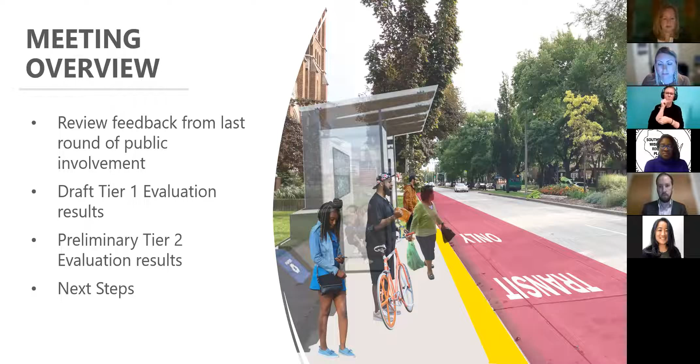So we wanted to talk a little bit about why we're doing this project. We're trying to provide some enhanced transit along this 27th Street corridor, so it's important to look at the area around the corridor.

The demographics around the corridor: 73% of the people living in the corridor are people of color, we've got nearly 1 in 5 households without a car living within a half mile of the route options, and 26% of the families who live in poverty in Milwaukee County live within a half mile of the corridor as well.

So providing enhanced transit service to these underserved populations is a priority for Milwaukee County, and we wanted to talk about some of the benefits. First, faster, more reliable access to jobs, education, healthcare, and other destinations by transit. We want a better experience for transit riders with improved stations and better, more frequent service, plus traffic calming and pedestrian safety enhancements near the stations - we'll talk more about the dedicated lane information later.

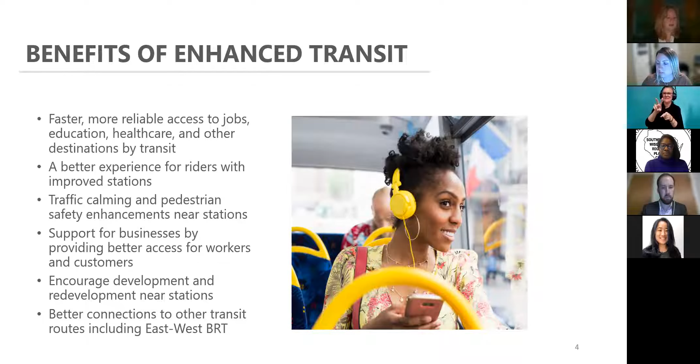So the range of alternatives we talked about after our last public meetings includes the transit technologies: bus rapid transit, rapid streetcar, and light rail transit. The route alternative options go from Brown Deer over to Bay Shore - we have two options getting to Bay Shore, one on Silver Spring, one on Hampton. Then the options run on 27th Street from Lisbon down to Drexel, which includes the Northwestern Mutual campus, over to Drexel Town Square in Oak Creek, and down to Ascension Hospital in Franklin.

So that's the basic range of alternatives that we are looking at for the study, for the Tier 1 study. All right, next slide, we want to talk a little bit about public involvement, and Nikki Payne is going to present these slides.

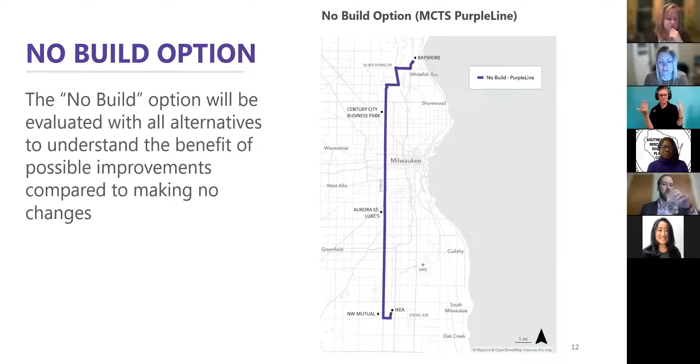Next slide. So for the three transit types—bus rapid transit, rapid streetcar, and light rail—they all have similarities in that they would all have enhanced stops, or stations, with off-board ticketing and level boarding, so that strollers, wheelchairs, and carts can be rolled right onto the bus from the station, no stairs. There would also be notification in the station for when the next transit vehicle is arriving, so it's a little more user-friendly when you're waiting.

For bus rapid transit, the bus would run in the roadway and would have at least 50% dedicated lane just for the BRT service. Its stations would be spaced about a half mile apart.

For rapid streetcar, that would run on the street as well, but on tracks installed in the roadway, with the route at least 50% in dedicated lanes. Station spacing would be about a quarter mile to a half mile apart. So it's a little bit different than the Milwaukee Hop, but the tracks and vehicle are similar.

For light rail, it would again be on the roadway, with tracks installed there. You can see there's a bit of separation between the transit vehicle and the regular traffic lanes. For light rail, the route is usually entirely or nearly entirely in dedicated lanes, with station spacing a half mile or more apart.

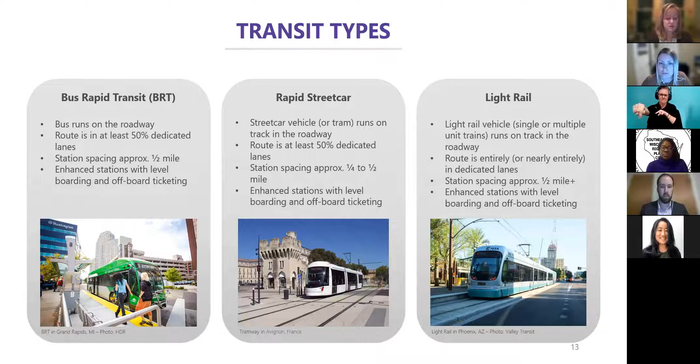So those are the transit vehicle options.

So then we looked at some factors to evaluate those transit technology types. We looked at typical capacity, so a right-sized mode for this corridor—how many riders we expect, and which service would handle those riders best. Typical service characteristics, like scheduling, frequencies, time of day, environmental characteristics, potential to bring in or catalyze development, and consistency with corridor character—what's there now and what would fit in best with the neighborhood.

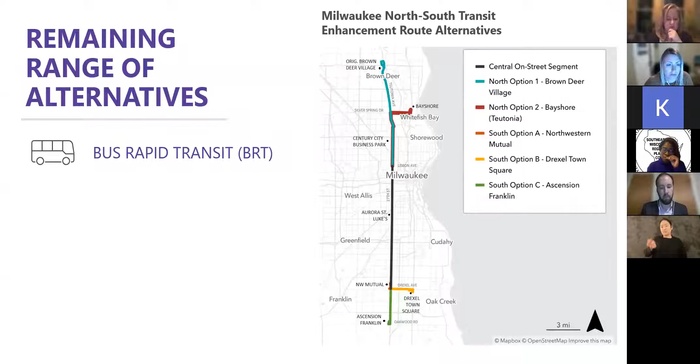After that evaluation, we have the remaining range of alternatives: bus rapid transit as the transit technology, with routes from Brown Deer over to Bay Shore along Teutonia, connecting to 27th Street, all the way down to Drexel, to the Northwestern Mutual Campus, over to Drexel Town Square, and down to Ascension Hospital in Franklin. That is what we've carried through to Tier 2.

Any questions regarding the Tier 1 evaluation that we've gone through so far? Anything? We do have some chats here.

Go ahead, Kevin. Yeah, we've got some interesting questions in the chat here. I was writing a long answer to Michael, but it's probably quicker to answer it verbally since it's a good time to pause.

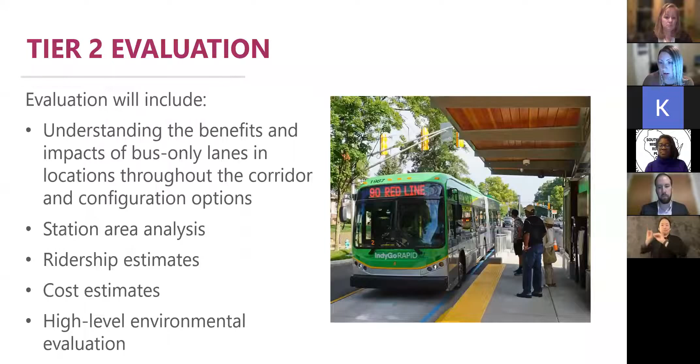So what are the benefits of bus only lanes? As Carrie mentioned in the last Q&A portion of the meeting, this is going to be one of the biggest things that impacts and improves the reliability of the service, and also improves travel times, allowing the bus to avoid traffic and other impediments in the roadway. It can also provide traffic calming depending on how it's implemented, which can improve safety. We've continued to hear a lot of feedback about reckless driving and traffic and pedestrian safety in the corridor, so we're looking closely at how we can best recommend these lanes so they do have that effect.

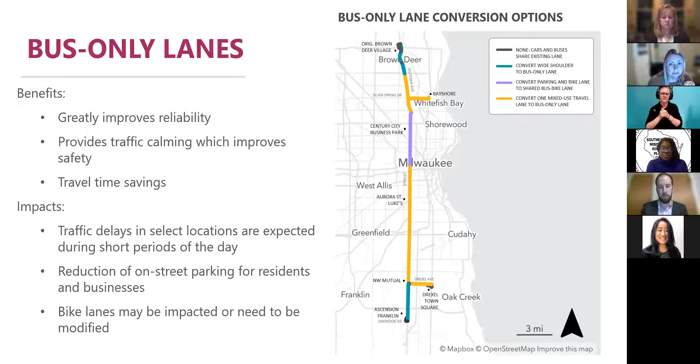But what does that really mean? What does significant traffic delay on a surface street mean? It can mean different things depending on how severe we're talking about, but really we're talking most likely about waiting for more than one traffic signal cycle at an intersection, during pretty specific times of day. In some cases, it also means slower driving speeds as a result of having more cars in fewer lanes at one time.

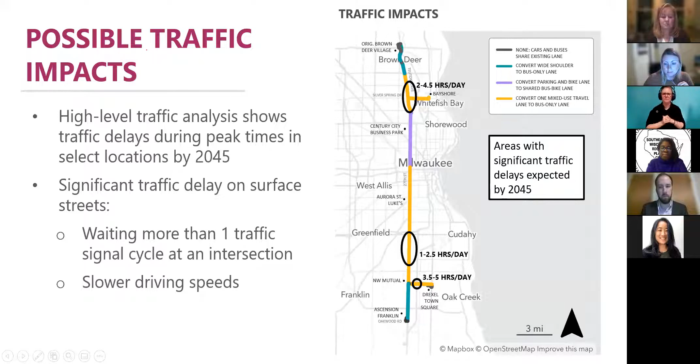Some of the configuration options we're looking at, as far as where in the roadway the bus only lane would be located and how that roadway would be configured, are going to be shown in the next 5 or 6 slides. These are examples throughout the corridor. As we move forward with the study, we'll provide some of these cross sections and what options are available throughout the length of the corridor. But this is just a sampling of that.

Starting on the far north end in the Brown Deer area, on Teutonia between Bradley and Calumet, the existing cross section is 2 travel lanes in each direction, a relatively wide median, and a paved shoulder on each side. So we've got a couple different options here. In this case, the paved shoulder could be converted to a transit only lane, either on the outside or the inside. A center running option could also be looked at in this area, where you would utilize the median for those stations.

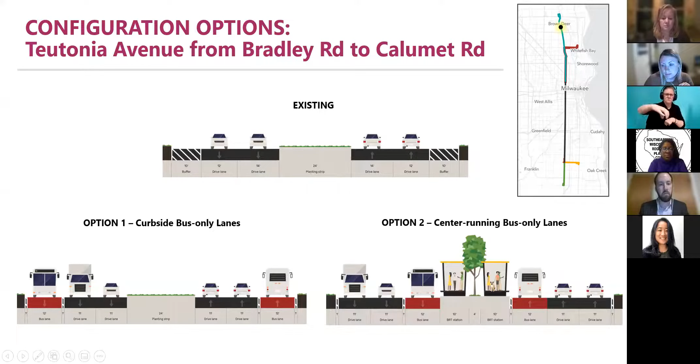Continuing down the corridor on 27th Street from Cornell to Atkinson, this segment has one drive lane in each direction, although it's relatively wide, about 16 feet in each direction, and then an 8-foot parking lane. So essentially what could be done in this segment would be making those drive lanes a little bit narrower, which is still well within the recommended width of a drive lane, 11 feet, and then have a shared bus bike lane.

In this cross section, we are showing these curbs here. I'm going to talk a little bit more about different options to actually physically separate a transit lane from a drive lane, understanding there are some pretty significant reckless driving concerns in this corridor. We don't want to recommend an option where a bus lane becomes a right-hand passing lane, making it even easier to speed or do things that reduce safety. So these are things we're going to look at, and I have some actual images to show in some of the cross sections.

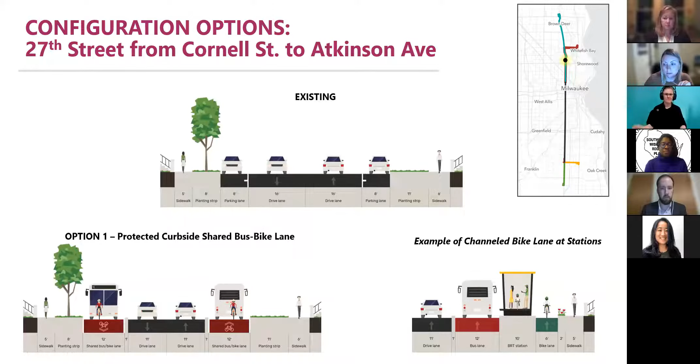Continuing south on 27th Street from North Ave to Lisbon Ave, this is somewhat of a similar existing roadway, although this is one of those segments that does have a dedicated bike lane in place. So we would be looking at having a shared bus bike lane along the outside, keeping those two travel lanes in the middle, with basically some kind of separated barrier possibly in this location.

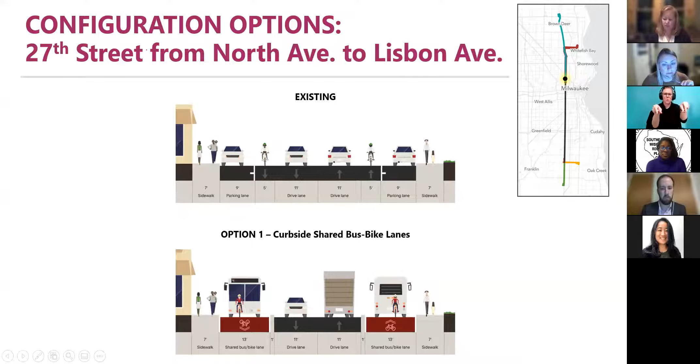On the 27th Street Viaduct, the long bridge that goes over the Menominee Valley, there are two lanes in each direction, a bike lane, and a painted buffer. An option on the viaduct would be to convert one of these travel lanes to a bus-only lane, retaining the bike lanes in each direction, retaining the sidewalk, and basically eliminating the painted buffer in the middle in order to have enough room for those bus lanes. One thing I'll talk about as we move to stations is whether we should recommend a station on the viaduct itself. That's a configuration that would have to be looked at, how the bus lanes would work with a station on the viaduct, and detailed questions that might alter how exactly this is laid out. That's just one example.

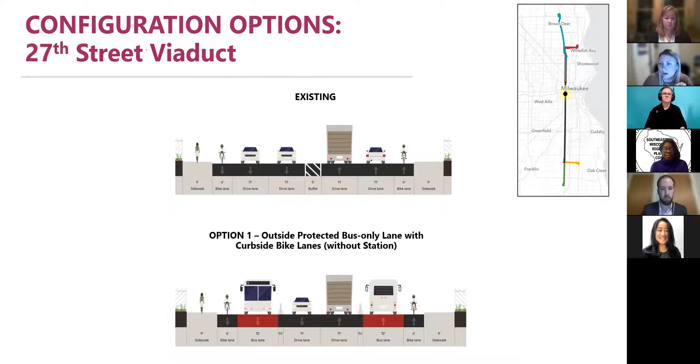Continuing south on Layton Boulevard between National and Lincoln, we have two drive lanes in each direction and a parking lane. In this case, we could convert one of those drive lanes to a transit lane, but since the existing lanes are relatively narrow and the parking lane is relatively narrow, we likely would not be able to retain parking. So we'd actually be looking at converting a drive lane and parking potentially in this area.

Now there are a few different options that could be looked at. Again, this is just our initial analysis, but in this case we do have some space left over, which could be used to have a dedicated bike lane. So you could have a dedicated bus lane, a dedicated bike lane, and then potentially some kind of protection in this area. In this segment we do have that median, so a center running bus lane could also be considered.

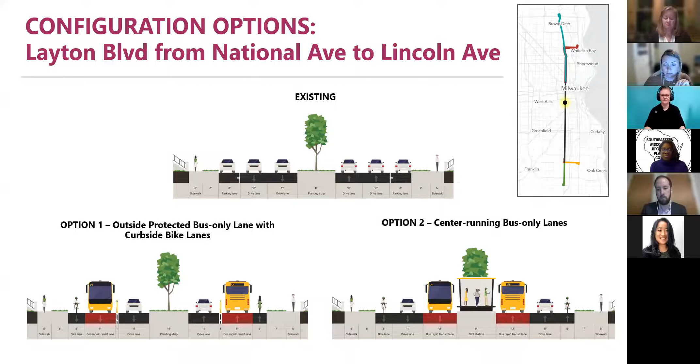I meant to mention this earlier, but just a few of the benefits of center running. You might be wondering, why would you want the bus lane on the center versus on the outside? Center running bus lanes can help even more with reliability because there's less interaction along the right side, since you've got people turning in and out of driveways and more right turns happening where people would be having to cross over into that bus lane to turn. So you've got less interaction with other vehicles, which really just improves the reliability.

There can also be a pedestrian safety enhancement with this, because even though people do have to cross into the median to get to the stations, it's actually cutting the crossing distance in half. Regardless of whether you're coming or going, at some point in your transit trip you're going to have to cross the full length of the roadway, based on the direction of traffic. This improves that, because you're just going to make that half cross twice instead of fully crossing one time, so it can be easier and more convenient for pedestrians to make that crossing.

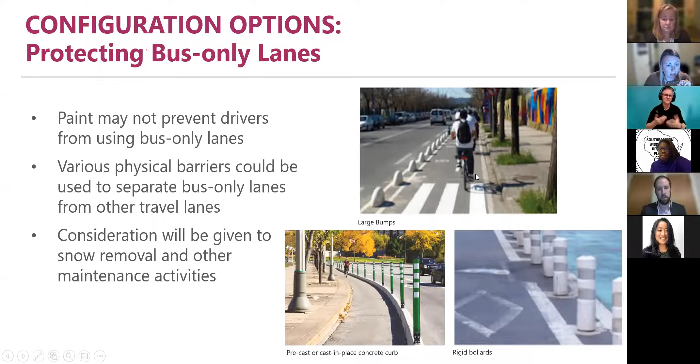Coming back to the interaction with bikes in the bus lane, this is something we're looking at and will continue to look at. We'd appreciate feedback on this specific topic. In some cases along the corridor, just because of the width that's there, there wouldn't be enough room to have both a dedicated bike lane and a dedicated bus lane. So we could be looking at shared bus-bike lanes in some portions of the corridor, which isn't ideal, but it could be an option to provide that facility. Where necessary, bike channels could be provided to allow space for bicyclists to get around buses, though this could also be used if a bike lane was continuous along the corridor.

I'm going to pause there because I think I'm seeing some questions about some of the configuration options.

I can take the first one. We answered in the chat about the stretch from State to St. Paul, just north of the viaduct. That is an interesting stretch. Between Highland and Wisconsin, there's relatively heavily used parking, and there are also traffic calming measures put in by the city, recently enhanced by the Near West Side partners with some planters. In that area, given how narrow the road is, if we wanted a dedicated lane, we'd be talking about removing all of that. So that's one of the things we're going to get feedback on from the neighborhoods and people attending tonight, to try to understand what the appetite is for that.

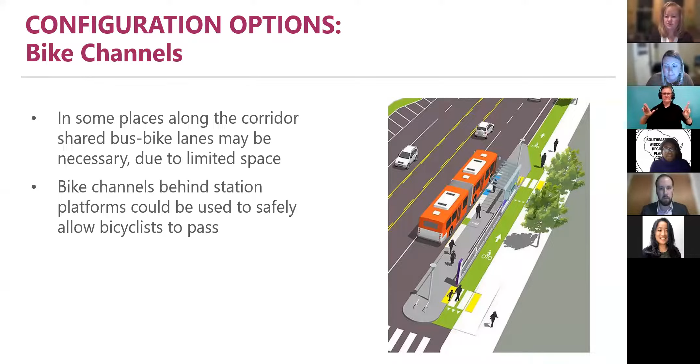Okay, so benefits of curbside versus center running - I feel like I covered that, but if you have any other questions, feel free to follow up. Maybe one thing wasn't clear: if the bus is center running, the doors would be on the left side of the bus rather than the right, next to the platform of the station. Not sure if that's answering one of the questions.

Yeah, that's a good point. I don't want to confuse people - you don't have to do it that way, there is a solution that doesn't, but we won't worry about that right now at this point in the study. The really key thing is what Liz talked about as far as conflicts. If you've got a lot of business or residence access directly onto 27th Street or the street you're on, then a curb lane also becomes a right turn lane, which is less efficient for moving the transit vehicle through compared to a center running lane.

Just some comments about bike lanes, saying they really need to be fully protected, especially on 27th.

Andrew's asking a bit more about the island platforms with center running lanes. There's kind of an assumption that many people would be making symmetrical journeys. So if you live on the north side of this route and work at St. Luke's, with side curb running lanes, you wouldn't have to cross the street to get to work, but when you're done with your shift, you'd have to cross all the lanes of traffic to get to the other side where the platform would be.

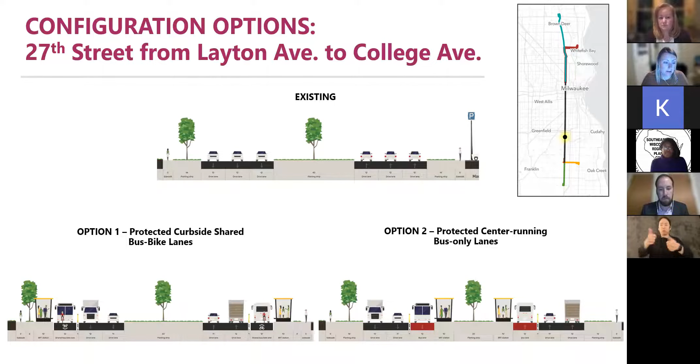The features of these stations are level boarding, high quality shelters with seating, off-board ticketing, real-time bus arrival information. They'd be accessible for people using different mobility devices, and someone with a stroller could roll right on. There's also dedicated lighting at the stations, which was something we heard in several comments early in the study, the need for lighting.

I see a question right off the bat about whether heating has been considered, which is used in some cities at stations. That's certainly something that could be up for consideration. For snow removal, there will actually be heating underneath the pavement at the stations, but that wouldn't provide enough heat to really feel warmth at the station. That's what the East-West BRT is doing, so yes, this project could do the same. As far as heat at the station itself, that's a comment we could include that isn't currently part of the East-West BRT stations.

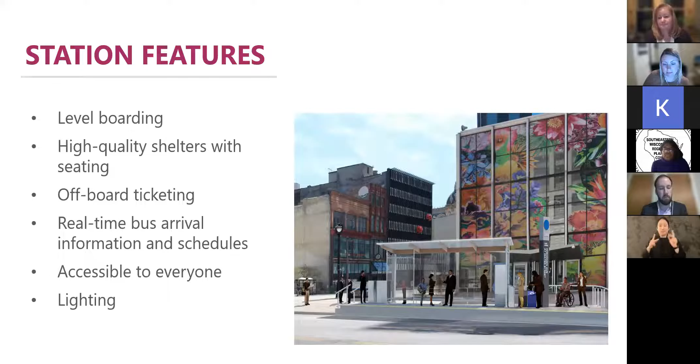In the survey we handed out at bus stops with our community partners, we asked about those types of features, and heating and/or cooling at the stops or stations was one of the more common things requested, one of the more popular options. That's definitely something we're planning to consider as the project moves forward, noting that both Minneapolis and Chicago do have heating. Somehow, whenever I stand under those on the L platforms, they've never lit a platform on fire as far as I know, but they generate a lot of heat, so they're very effective.

For the most part, stations are spaced a quarter to a half mile apart, at intersections with other major streets, transit routes, and important destinations. We'll be taking a deeper look at ridership at each station, access as far as equity goes, as well as general population and job access around each station. The three stations in the middle near the viaduct are still under consideration as far as whether there should be a station at the viaduct or adjacent to it.

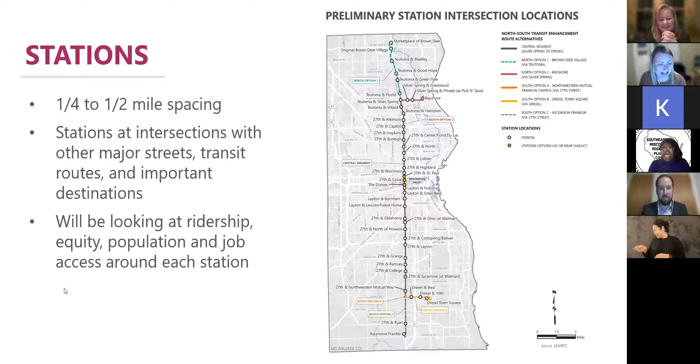I had a couple of dogs break into my office here, so you're seeing some movement in the background. Those are my pets.

We did get a question related to the stations before you move on, about to what extent park and ride would be applied to these stations. At this point, we're not getting to that level of analysis, but there definitely are some places it may make sense to think about, and probably a lot of places it doesn't. The county wouldn't plan on buying a bunch of land to put in a structure or a lot, but there are some places, depending on what alternative we end up with. For instance, on the northern end, there's already a park and ride lot at Bayshore that this service could make sure to serve.

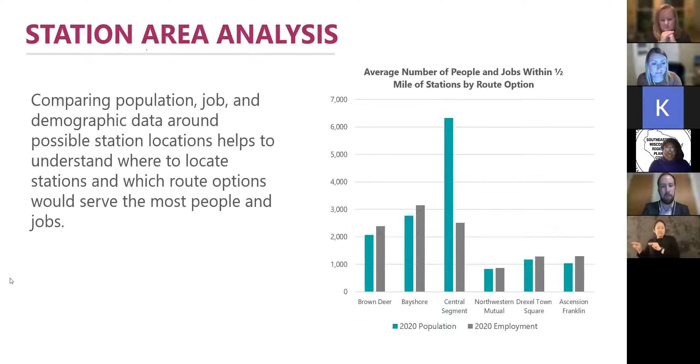All right, so I'll pass it back to Carrie to finish off the last few slides.

We have the range of cost estimates that Kevin alluded to earlier. This assumes the project would be eligible for up to 80% federal funding. For the low cost option on this range, we looked at the shortest route, from Bayshore to Northwestern Mutual at Drexel, about 17.3 miles long, 32 station pairs (roughly 64 stations), and 23 buses. We also looked at this route as having 50% dedicated lanes for BRT and 50% in shared traffic without separation on that dedicated lane, which makes a bit of a difference for costing. So the lowest cost option was estimated at 133.6 million.

If you look at our pie chart, you can see how the costs are broken down, and the big piece of pie in gray is called contingency. As Kevin mentioned, at this level we just don't have the engineering detail for really good cost estimates, so this is a ballpark figure that represents the flexibility we've built into this estimate.

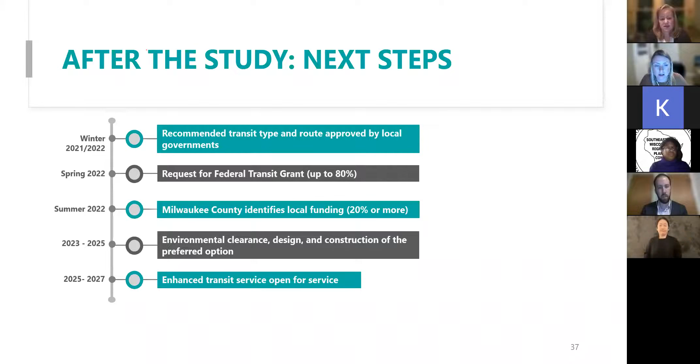We've got a full list of our public involvement that we've done so far, which I think Nikki mentioned earlier, and we'll have the other documents as well. We did also finalize our purpose and need document for those who have attended previous meetings. So we'll just continue posting those documents, including the tier 2 analysis when it's finished, so stay posted on that.

I think we have some more questions. Yeah, we do have some questions, but I also just want to mention that people who did attend this meeting, and anyone on our email list, will receive a follow-up email probably at the end of this week, after our meeting on Thursday.

That is going to be another opportunity to provide comments. We'll have some short surveys, and we'll also include a recording of this meeting. That way, if you have things that you think of after we're done tonight that you want to provide, those will be places you can provide them. Or if people wanted to make it this week and just couldn't make one of the meetings, you could forward that to them, that would be great as well.